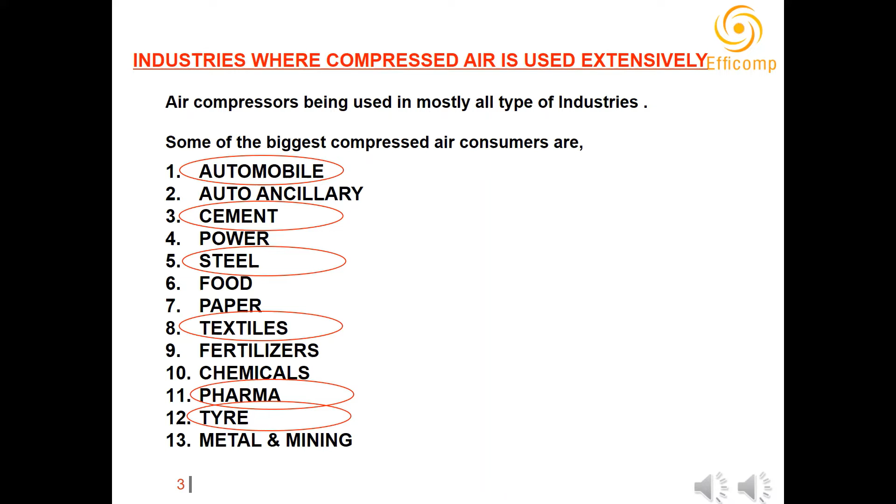Compressed air is the second most critical utility after electricity for any plant. Mostly all industries use air compressors for instrumentation and other purposes. The operating cost in any industry for compressed air is generally around 10% of the overall power bill, but for a few industries highlighted here in the slide, it can be as high as 30% of the operating cost. Few major compressed air consuming industries are automobiles, cement, steel, textile, tire, pharma, etc.

Capital investment costs are around only 4%. So our focus must be on the 80% portion rather than on the 4% investment cost during equipment selection for compressed air systems.

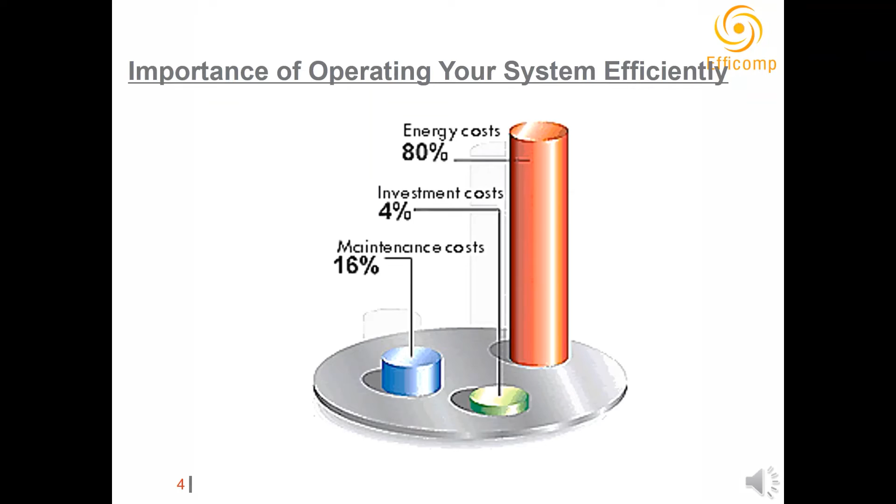Compared to other utilities like steam, electricity, water, which have operating efficiencies more than 60%, compressors have operating efficiencies only in the range of 15% of the total input. So the diagrammatical representation clearly depicts that 8 horsepower of electrical input yields only 1 horsepower of compressed air power, and the rest is lost as heat.

Hence, whenever we are wasting any compressed air, say through leaks or misuse, we must be aware that compressed air is the costliest utility of any plant. Yes, you heard it right. It is the costliest utility of any plant.

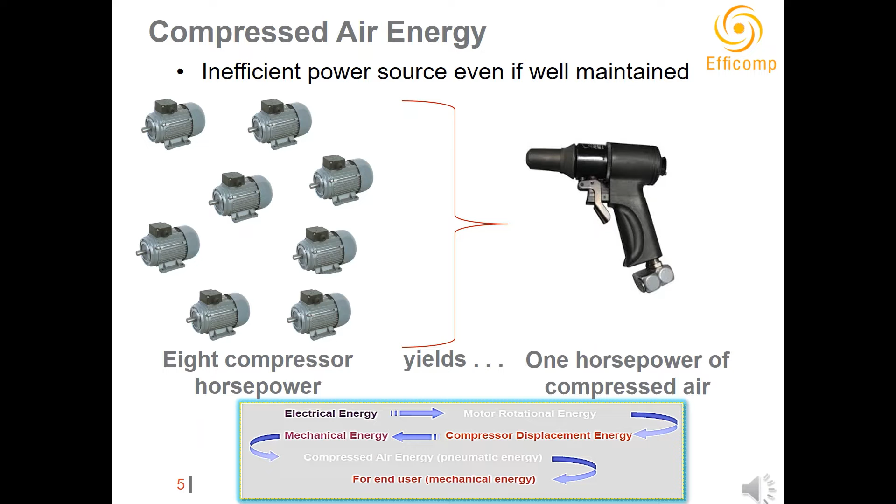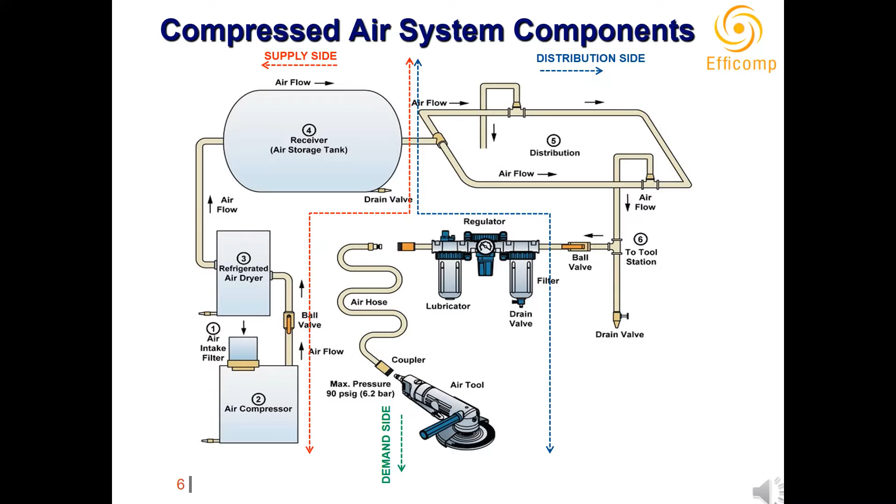So moving ahead, whenever we talk about compressed air systems, our focus generally goes to the air compressors rather than looking at it as a system. For any system, the supply is only when there is a demand. So any impact or saving on the demand side or in the distribution side has a direct impact on the supply side operation and results in good savings. Hence, rather than focusing on the supply side, it is advised to look at it as a system, and individual components of the system must be given due importance to achieve savings and operational efficiencies.

Before we start with the saving opportunity discussion, just a small intro on types of compressors. Compressors are mainly divided into two groups: positive displacement and dynamic type. Positive displacement works on the principle of volume reduction, that is, pressure increases with reduction in volume, whereas dynamic compressors work on the criteria of kinetic energy conversion to pressure energy.

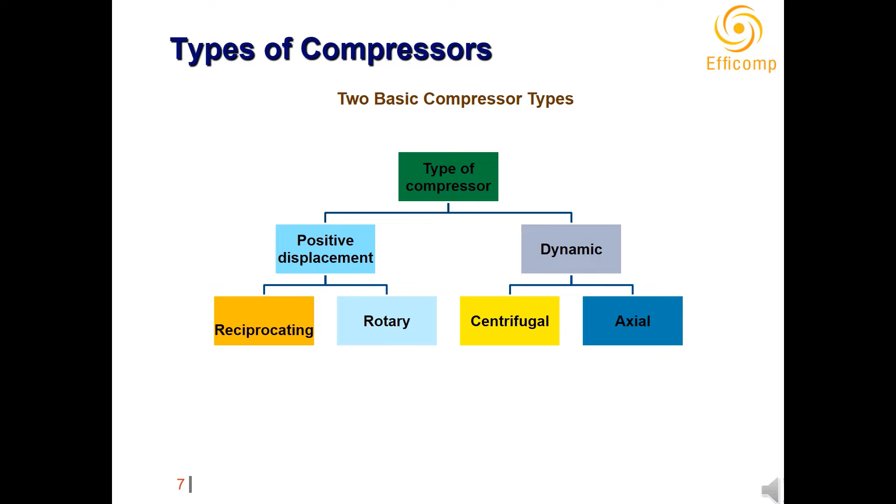In industry, you will generally see two types of positive displacement compressors: reciprocating type and screw type. Both work on volume reduction, wherein a specified volume of atmospheric air is compressed to the desired pressure. In reciprocating compressors, this is achieved through a cylinder and piston arrangement, whereas in screw compressors, it is done through two opposite moving screw elements, where atmospheric air gets trapped and the area gradually decreases, resulting in volume reduction and increased pressure.

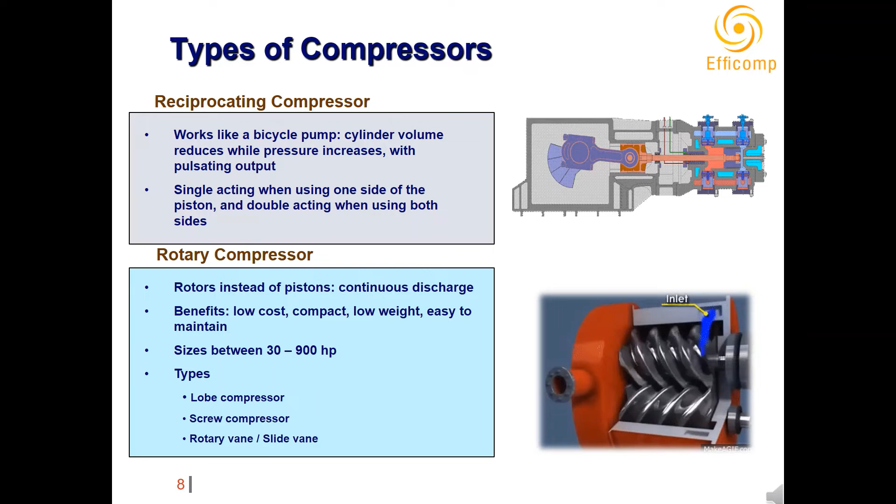All positive displacement compressors are termed constant volume machines, as their delivered volume remains the same irrespective of delivery pressure. Volume delivery can be altered by reducing the prime mover speed, that is the electrical motor, so RPM plays an important role in the volume delivered. In the slide you can see the reciprocating type on the upper picture and the screw compressor on the lower picture.

When we talk about dynamic type compressors, you will generally see centrifugal compressors used in industries. They are used for large demand requirements and are termed base load machines. Centrifugal compressors work by giving kinetic energy to atmospheric air and then converting that kinetic energy to pressure energy through sudden obstruction of the high velocity air coming out from the impeller, with help of a diffuser. They are also termed constant pressure machines and operate according to their defined operating curve ranges.

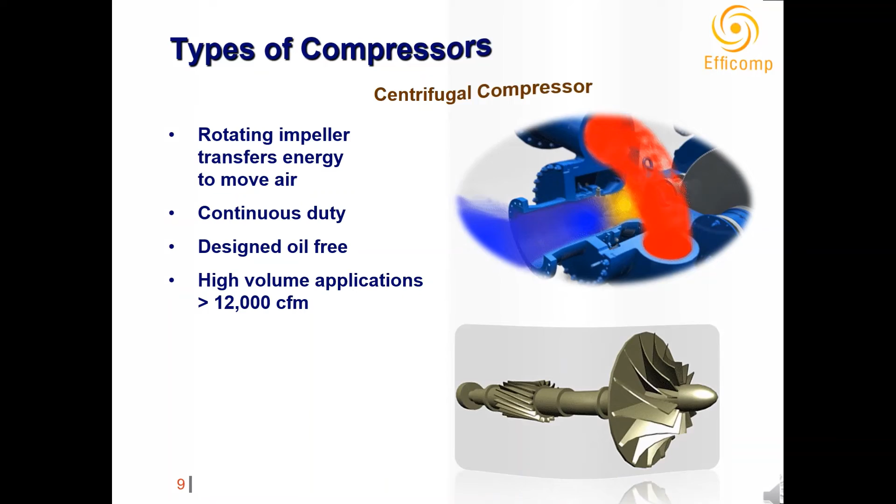Whenever we talk about energy savings in a compressor system, our approach should be reversed - starting from the demand distribution and then coming to the supply end. On the demand side, the easiest and one of the biggest losses in the system are the leakages. Leakages can occur through pipe joints, drains, hose pipes and fittings, FRLs, etc. The demand side comprises all users consuming compressed air, and it has a direct impact on the supply, that is, the compressor operation.

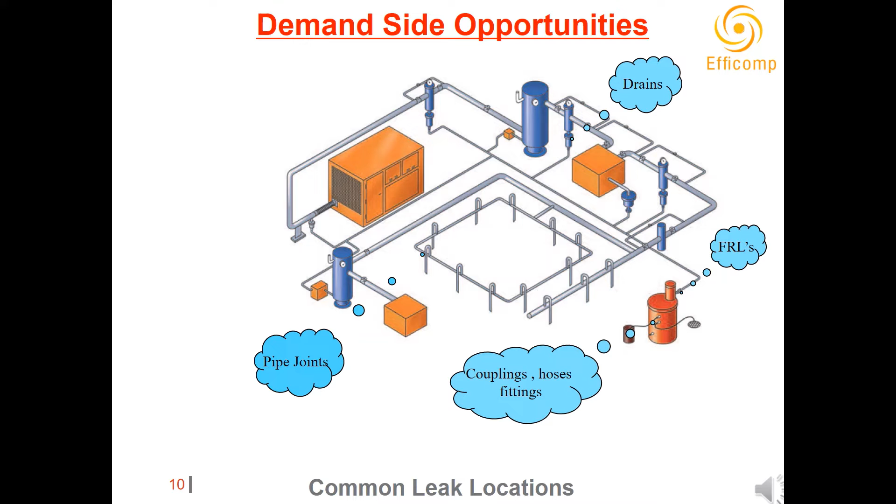When we look at the general industry demand pattern, we see that out of the total productive demand, around 20% is lost in air leaks only. This leakage demand is part of the plant demand, and the compressors work to fulfill the leaks as well. So after the demand for leaks, the remaining air is available for productive demand.

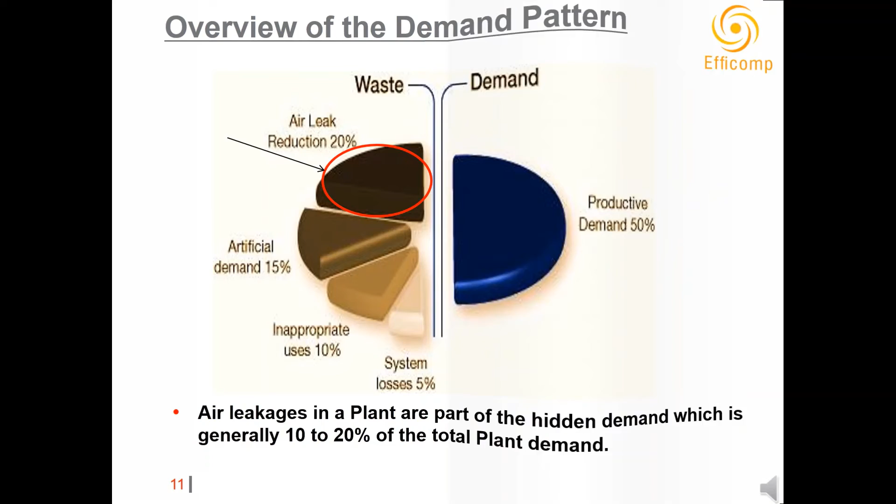With leaks forming the biggest loss in the system, they also present the easiest way to save energy. To quantify the amount of leak loss in any plant, there is one simple method using which an estimation of the leak loss can be found easily.

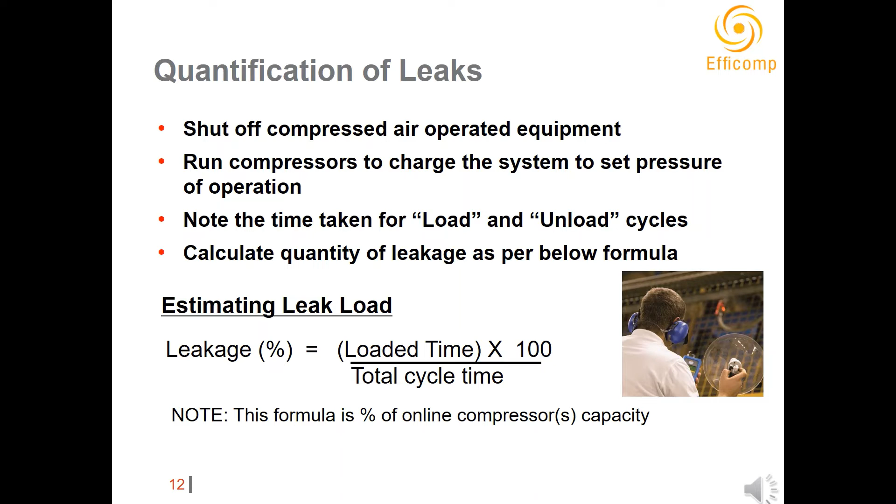As shown in the slide, during a holiday in the plant, we can do this exercise. Once the complete plant is stopped, shut off all compressed air operated equipment and run compressors to fill air in the system. No user should be consuming air during this trial. Once the system fills with compressed air and loading-unloading of the compressor starts, note down the load and unload timing using a stopwatch, then use the formula shown in the slide to calculate the leak loss.

Take at least 5 readings of the loading-unloading cycle and make an average value for the loading and unloading time before putting it in the formula. Once calculated, the formula gives the approximate percentage loss in the plant due to air leakages. You can multiply the compressor capacity, that is the CFM of the working compressor started during this trial, to get an approximate CFM loss through the leaks.

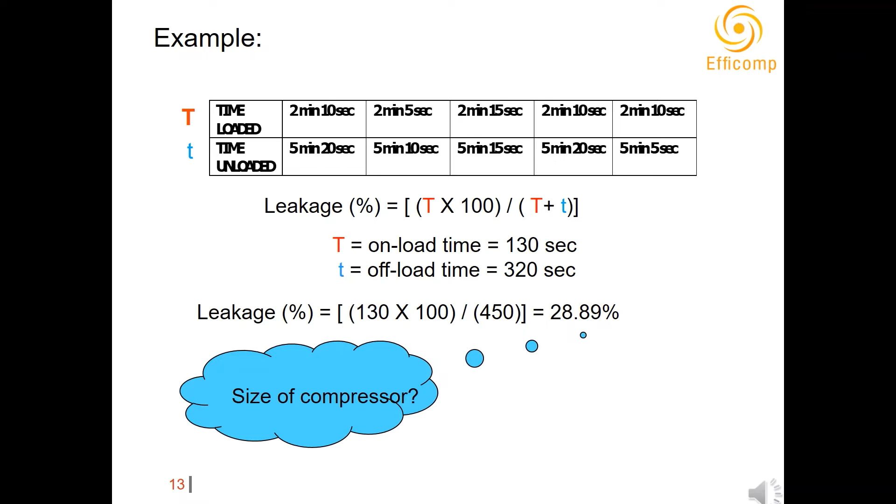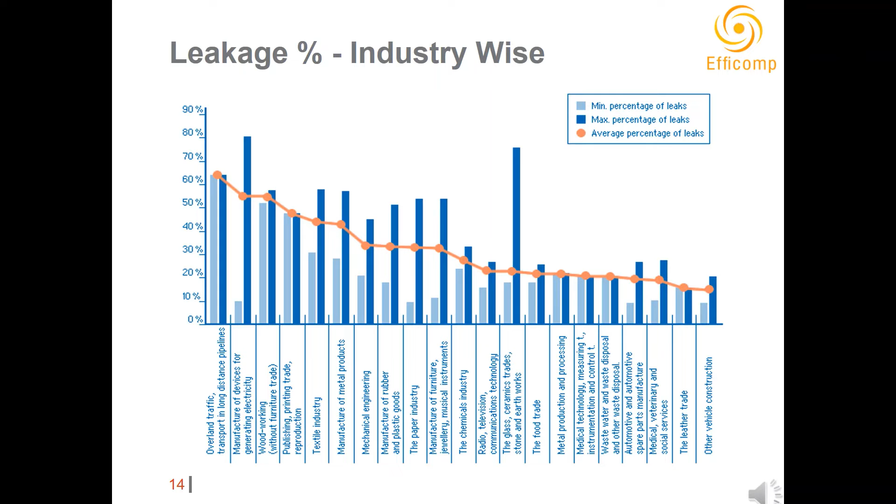For example, if the operating cost of a compressed air system is 1 crore for a year and 20% is leakages, you can easily calculate that 20 lakhs can be saved in a year if the leakages are attacked.

Moving to the distribution system, it mainly comprises the headers and the drops. Headers are the main component of the distribution system and are generally of two types: the ring main system and the dead head type system. An improperly designed header may lead to pressure loss in the user section, and to compensate for this, compressors have to work at higher pressure.

There is a direct correlation between compressor pressure increase and power, which is around 7% for every 1 bar increase or decrease in pressure. So the distribution system must be designed taking into account the overall pressure drop, which should not be more than 7 psi for any system once the compressed air is supplied to the plant.

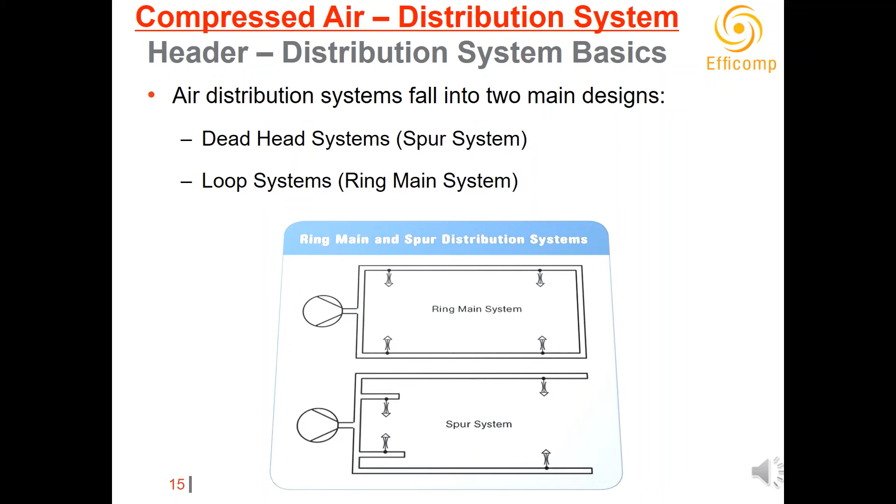In a dead head system, there is only one single line running from point of origin, that is the compressor house, to the user section. A diagrammatical representation of the same is shown here in the slide.

If user number 5 needs any air, he has to wait for air to come all the way after all other users like user 1 to 4 have consumed air. In this scenario, generally user 5 is always starving for compressed air and pressure drop is a common problem. To overcome this, generally the compressor operating pressure are raised, which further increases the power consumption of the system.

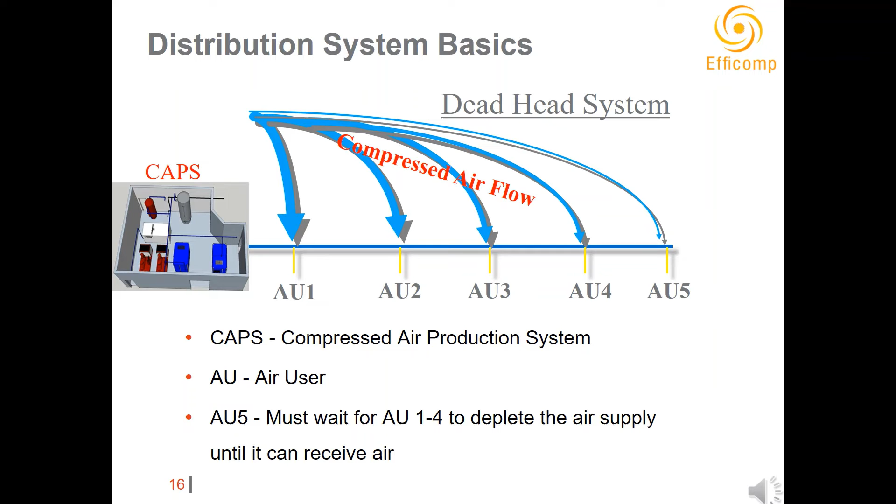Hence, dead head systems are not recommended for compressed air systems. To overcome these issues, a ring main system is proposed. In a ring main system, the main supply header is connected back to the same supply header, creating a loop. This creates two passages for the compressed air to flow in the pipe, as you see in the diagram.

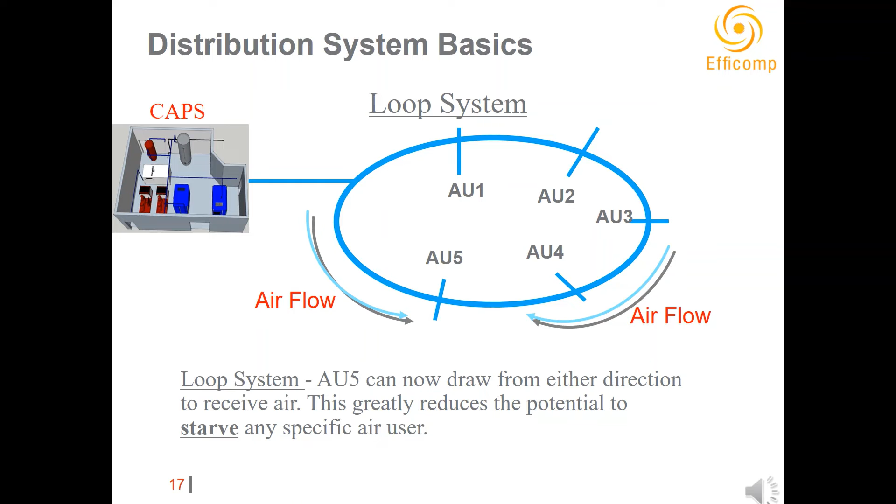So if we consider the earlier scenario of a dead head system, now user 5 can get air from both sides of the piping rather than depending only on the earlier circuit for air requirement. A ring or loop system also reduces velocity of air in the pipeline, further reducing pressure drops, and thus can help reduce supply pressure in the compressor house, leading to energy saving on power consumption.

Now moving to the supply side of a compressed air system, which comprises of the compressor, filter, dryer, demand controllers, and air receivers. In the supply side, the air receiver is one of the key components, which helps reduce sudden air supply jerks and stores sufficient compressed air in the system to reduce cycling of the compressors.

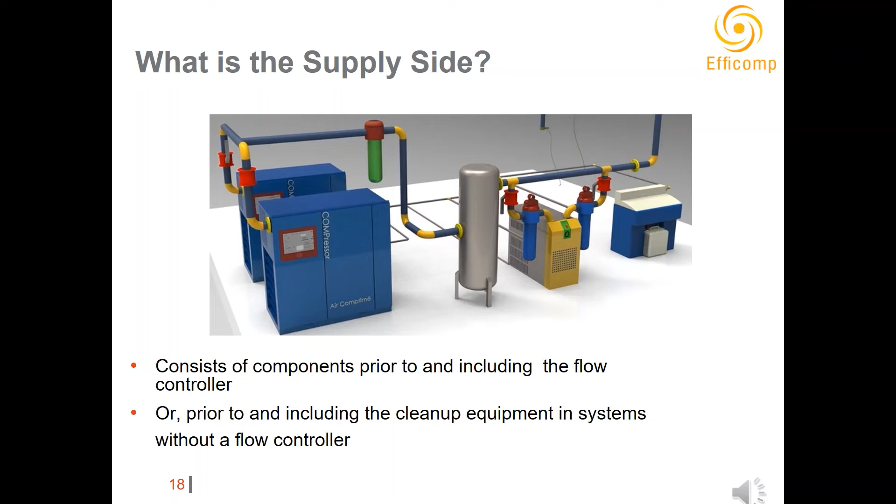For every plant, there has to be a minimum storage size to counter sudden demand and sudden compressor stoppages. The term used to define the effective storage is called capacitance. A receiver acts like an electrical capacitor bank: it stores when the supply is excess and releases when the demand is more.

Capacitance is termed as the amount of compressed air needed to be supplied or removed from the system to raise or reduce the system pressure by 1 psi. Higher the capacitance, lower will be the rate of pressure drop over time, and the unit is denoted in feet cube per psi. It should be noted that for compressed air systems, there is a terminology called 'big is beautiful' in terms of piping and air receivers. So, the higher the size of pipe or the higher the size of receiver, it is always going to help the system.

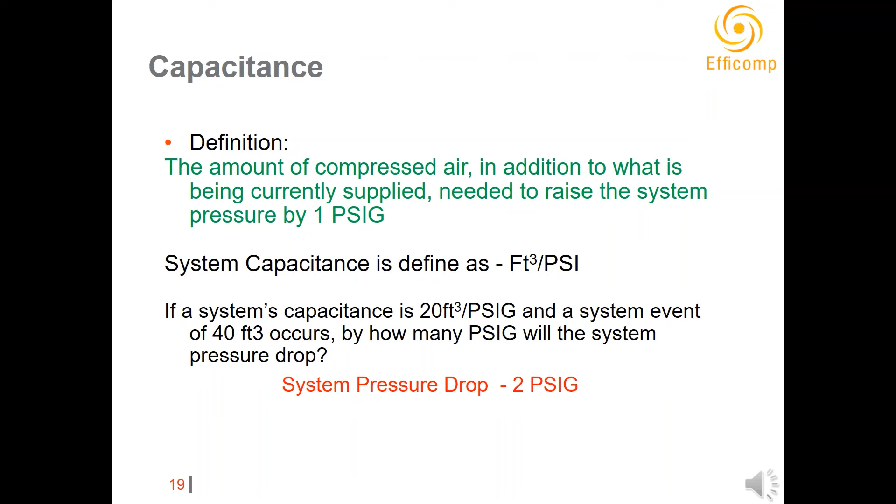A formula for system capacitance calculation is shown in the slide. You can use it to define the minimum storage capacity which can support production during sudden demands or any compressor stoppage for a certain period of time. If properly designed, the compressor operating time can also be reduced, leading to savings in compressor power consumption.

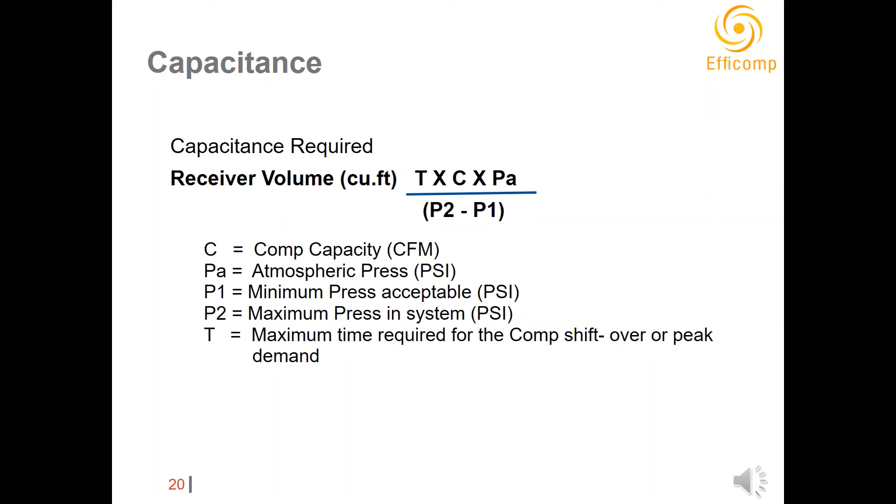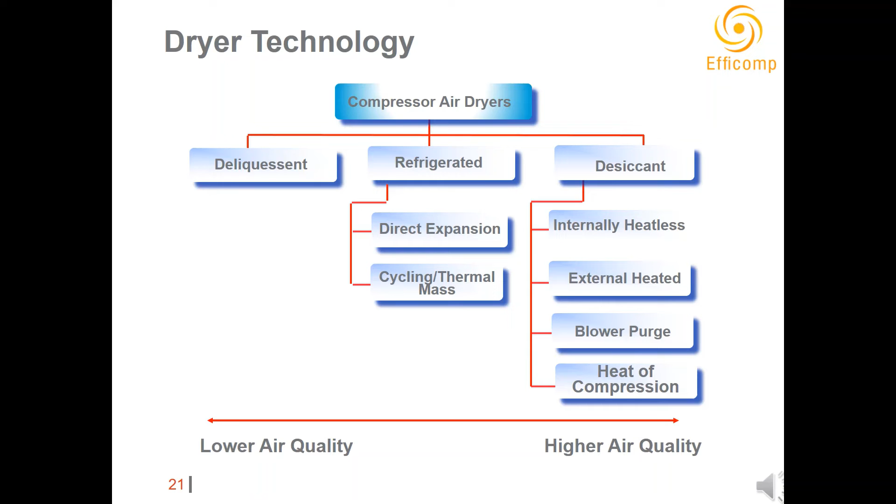Air dryers also form an important part of a compressed air supply side. They are generally of two main types used in industry: refrigerated type and desiccant type. As we move from refrigerant to desiccant type dryers, the quality of water removal increases, that is, the air quality improves. But air quality has its own cost - higher the quality, higher is the cost involved. Dryer selection must be done purely on the user's requirement.

A refrigerated dryer works on the criteria of a refrigeration cycle, wherein compressed air is cooled in a refrigerant to air heat exchanger up to 3 degrees centigrade in pressurized condition, at which, due to the cooling effect, water in the compressed air condenses.

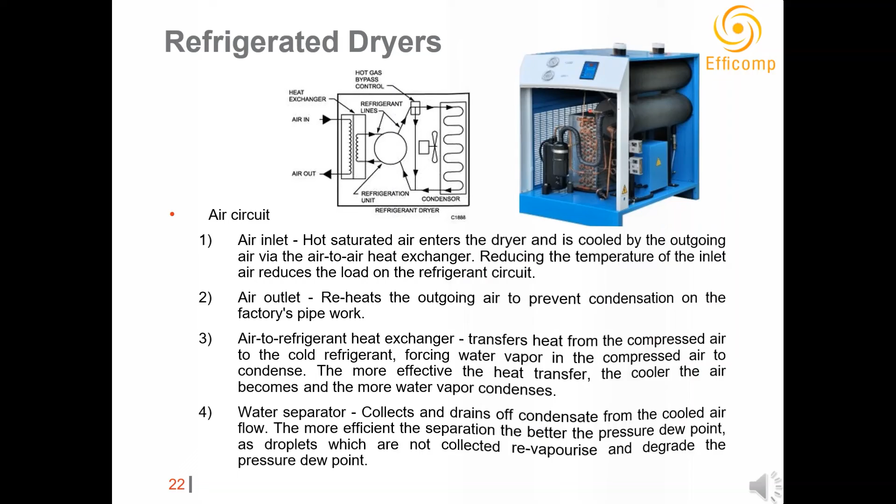Moving to the desiccant type dryer, they are mainly of four types: heatless, externally heated type, externally heated with blower, and heat of compression type.

The quality of air coming out from a desiccant dryer is of lower dew point, generally minus 40 degrees C PDP, but the operating cost for this type of dryer is very high. A desiccant dryer works on the principle of adsorption, where compressed air passes through a tower filled with alumina or silica gel, which has great affinity towards moisture, and it adsorbs moisture from the compressed air.

But once the tower fills with moisture completely, that is when it gets saturated, it again requires to be regenerated back to original condition. During this time, compressed air passes through the second tower of the dryer, but around 12% of the outgoing treated air is thrown back through the first saturated tower to remove the moisture for regeneration. This 12% use of compressed air is really high for any compressed air system, equal to an additional 12% demand on the compressor itself.

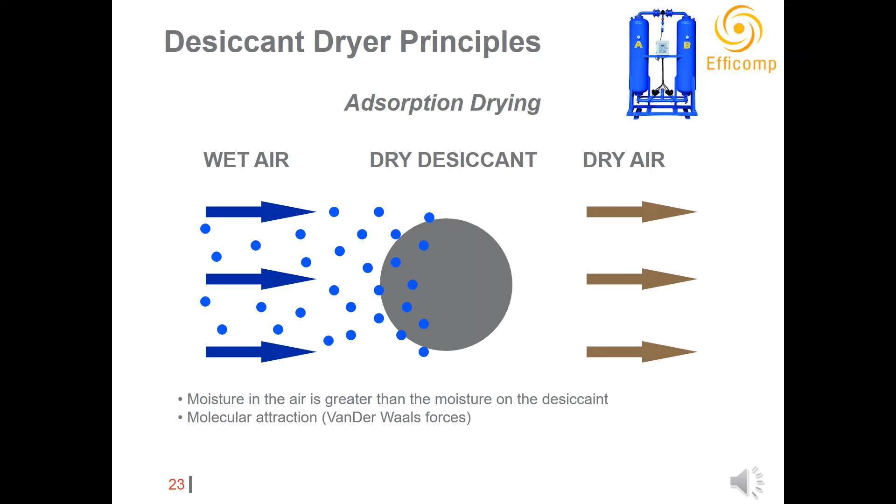Hence, desiccant dryers should only be used when higher quality of air is required. Otherwise, a refrigerant type dryer suffices for most user requirements. A representation of the process of adsorption is shown here.

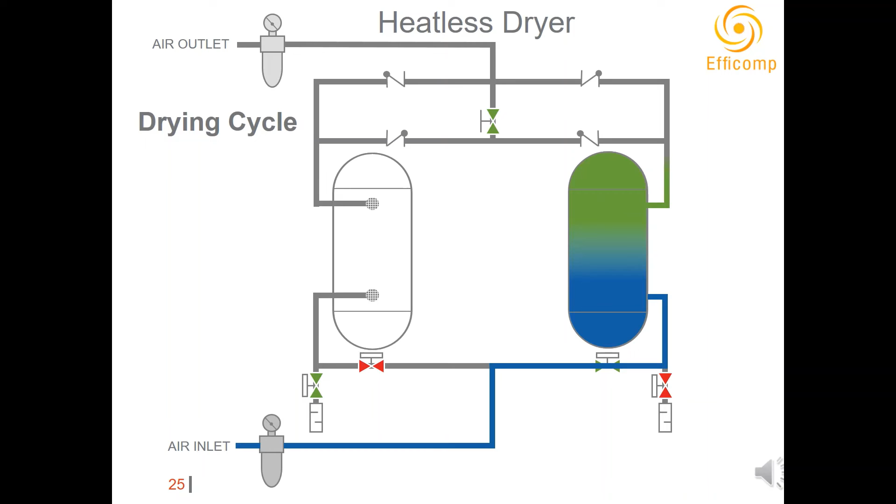This slide shows the compressed air flow circuit in a desiccant dryer, showing both the drying cycle and the regeneration cycle. The purge losses in a simple heatless dryer can be as high as 12%. Further, the pressure drop across these kinds of dryers is higher, around 5 to 7 psi, which requires compensation by increasing the compressor operating pressure. Hence, two main points - the purge loss of 12% and the pressure drop created - must be taken into account before selecting this type of dryer for a system. It directly adds to the operating cost.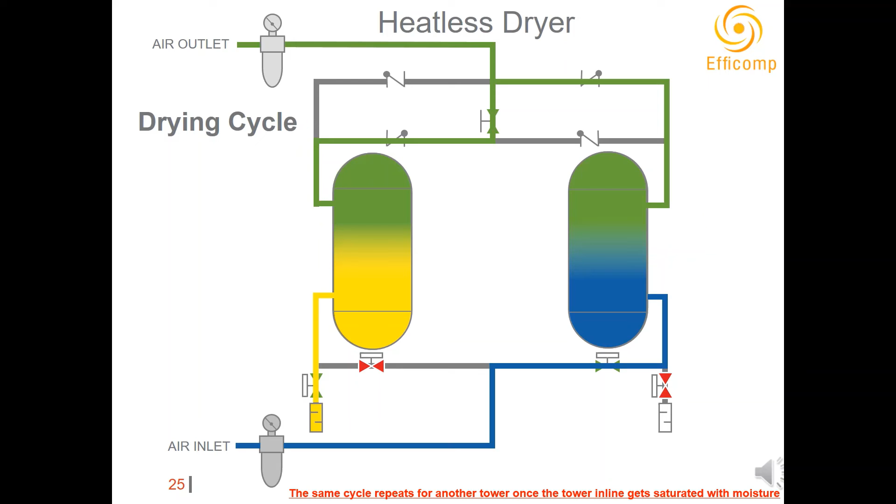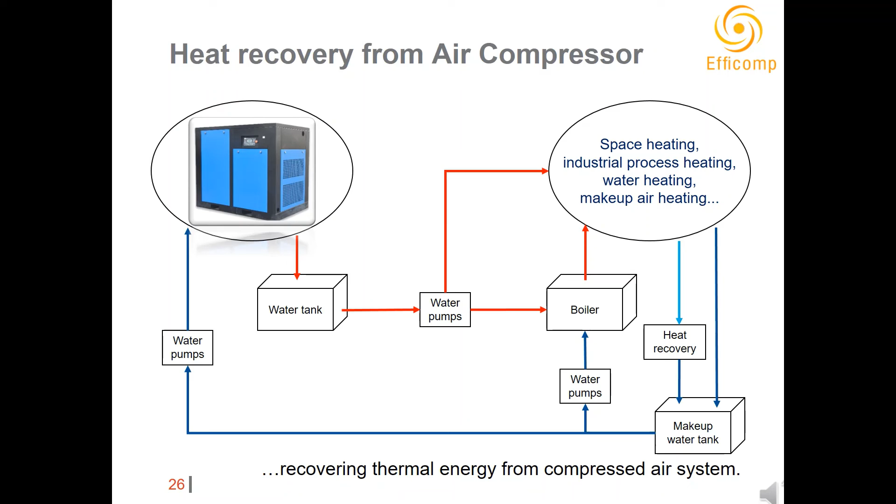Going ahead, as we discussed during the initial opening slides, around 80% of the power given to an air compressor is lost in heat, which can be easily recovered from the compressor for space heating, water heating for processes, boiler makeup water heating, etc. An air compressor can heat water up to 80 degrees centigrade, which can be utilized for many industrial processes. Around 60 to 70% of the motor power equivalent heat can be extracted from an air compressor, which can lead to fuel cost saving.

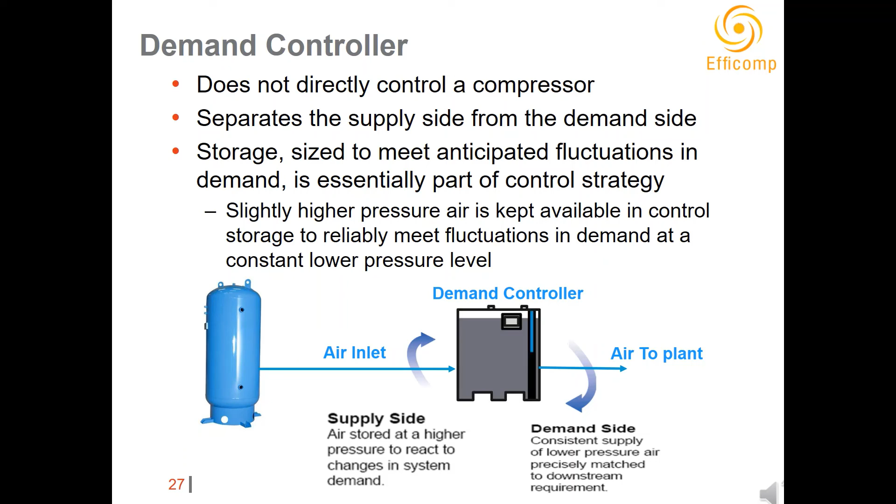One of the other saving areas is supply pressure optimization. A demand controller is a device installed just after an air receiver to create a positive buffer. It does not allow any excess pressure to go to plant users, which helps reduce plant artificial demand and also leak quantity. It functions similar to a water dam, releasing air as per demand and stopping any free uncontrolled flow to plant users. If sized properly with correct system output pressure defined, a demand controller can lead to savings in compressor operating power from 6 to 20%.

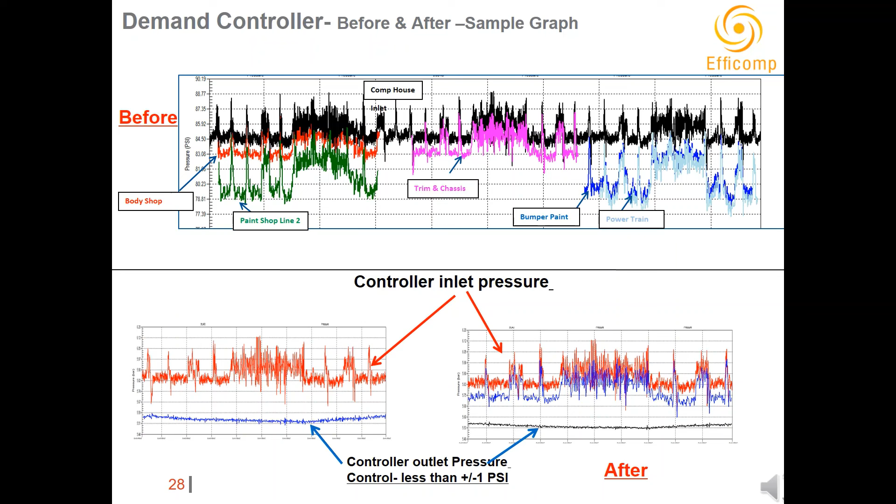Some sample graphs of a system with a demand controller are shown in the slide, which show the impact of controlled release of the system air pressure.

Traps are also a very important and key part of saving in a compressed air system. They help to remove condensed moisture from the system. If not installed, people generally tend to keep drain valves open manually, which leads to loss of costly compressed air. The most suitable type of trap is a zero loss drain trap, which helps remove only moisture from the system without wasting any compressed air.

In a compressed air system, there are virtually 4 to 5 traps which need to be installed at the compressor, aftercooler, air dryer, air receiver, and plant header lines. They are of mechanical and electronically operated types.

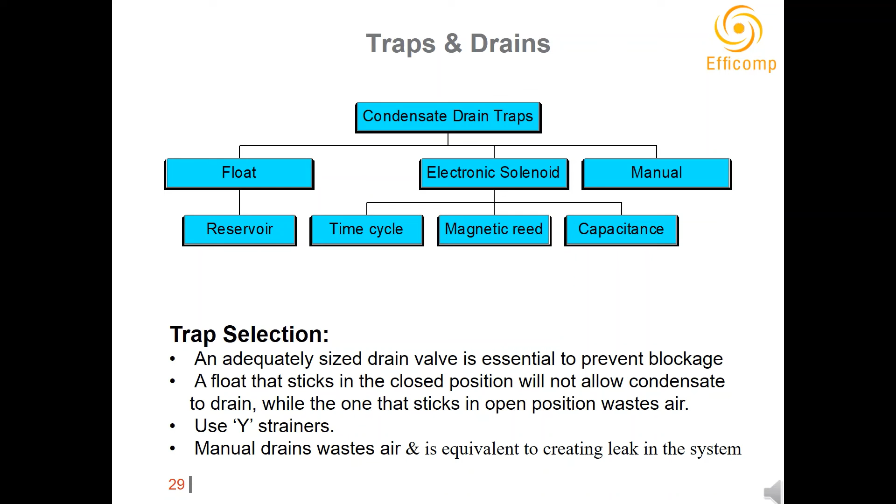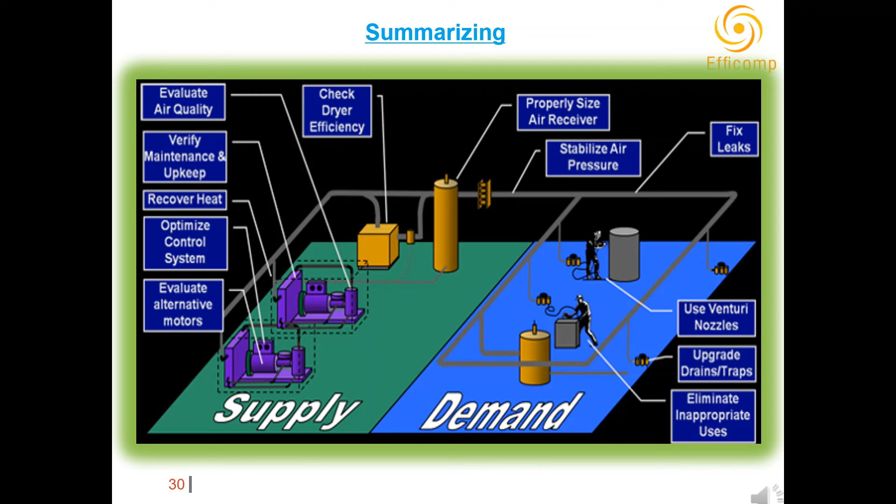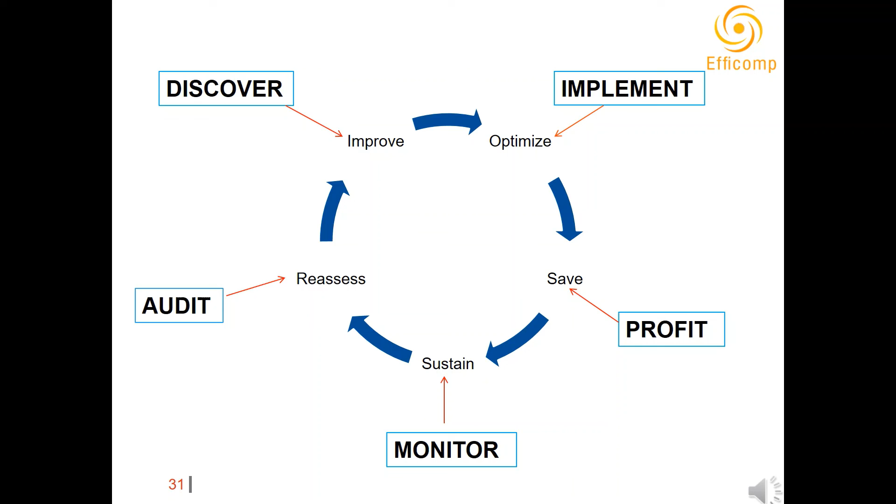Also note that this is an introductory session on simple and easy saving opportunities in compressed air systems. Going ahead in future videos, we will discuss individual system components, details, and their impact on operation and costs. So friends, this was our introductory session. The topics covered here are basic, but people in this field know it's a big ocean. So in the upcoming videos, we'll cover each component in brief. Stay connected. Thank you.